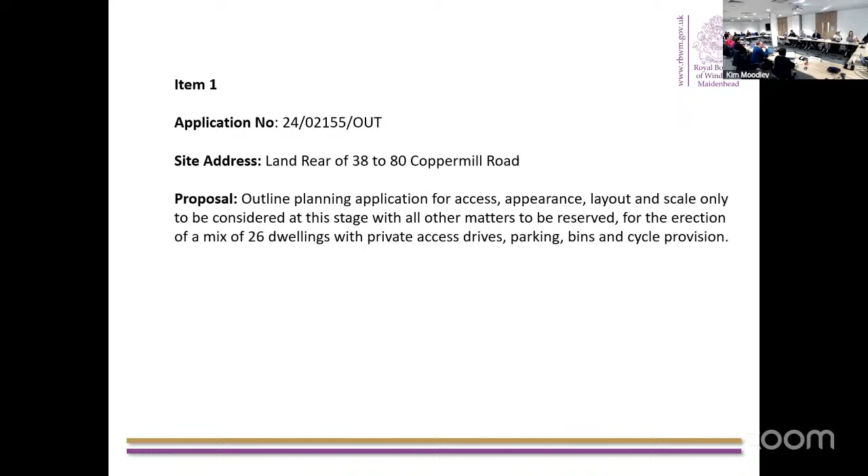Okay, thank you, I'll move on to the presentation. Since this is a more unusual site, and given the way the planning balance is done, I thought it'd be useful to give the context and explain how the planning balance was carried out first, before moving into the plans and detailed considerations.

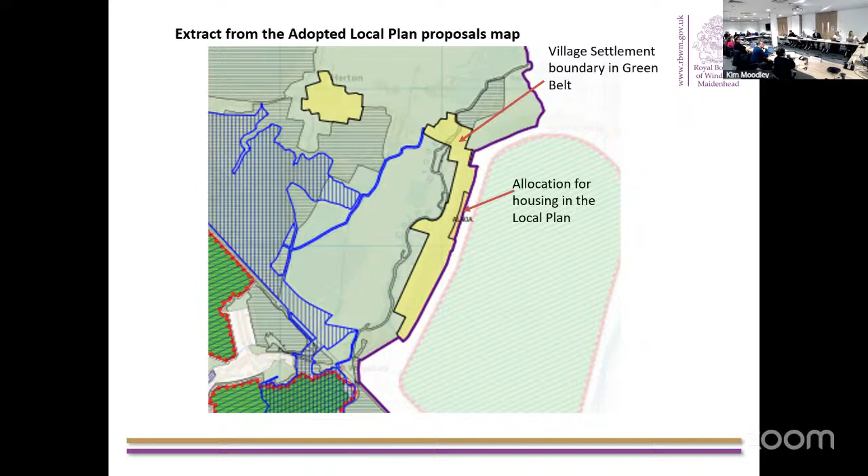When you do the balancing in the green belt, you have to consider whether there are other considerations which clearly outweigh the harm to the green belt, and the other harms arising — that's set out in paragraph 153 of the framework. In officer's opinion, there are not other considerations that clearly outweigh the green belt harm and the other harms identified, and I'll go through that in more detail as we proceed.

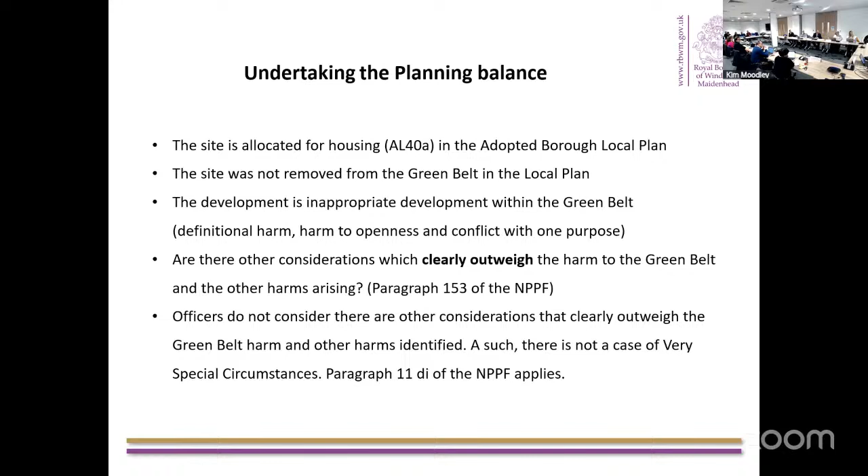So when you come to that conclusion, a case of very special circumstances doesn't exist. In terms of the tilted balance, normally, if you're not restricted by green belt or other matters in footnote 7, you'd have the presumption in favour of sustainable development. In this case, it doesn't apply, because we're saying there isn't a case of very special circumstances.

I just wanted to make the point that, as this is an allocated site, if you did have a policy-compliant scheme that met the proforma requirements, you'd probably end up concluding there was a case of very special circumstances, in which case the tilted balance would be engaged. I'm making that distinction because I think it's important to know going forward, but for the purposes of this scheme, the tilted balance is not engaged. I hope that makes sense, and I'm happy to clarify once I've gone through the slides.

In terms of how the balance has been done, paragraph 153 of the framework sets out the approach. Local planning authorities are required to ensure substantial weight is given to any harm to the green belt — that can be definitional harm, including harm to openness, and conflict with purposes. It states that inappropriate development is, by definition, harmful and should not be approved except in very special circumstances, and those very special circumstances can't exist unless there are other considerations that clearly outweigh the green belt harms and other harms.

These include delivering a high quality scheme that fronts onto Coppermill Road and respects the character of the neighbouring residential units and the openness of the green belt. There are also requirements about preventing access to the reservoir to the east of the site, providing appropriate mitigation measures for noise and air quality impacts from Heathrow Airport, protecting trees worthy of retention, providing a soft landscaping strategy to reflect the character of the local street scene, considering flood risk as part of a flood risk assessment since the site is larger than 1 hectare, providing mitigation for surface water flood risk, having a SUDS scheme, and the provision of 40% affordable housing.

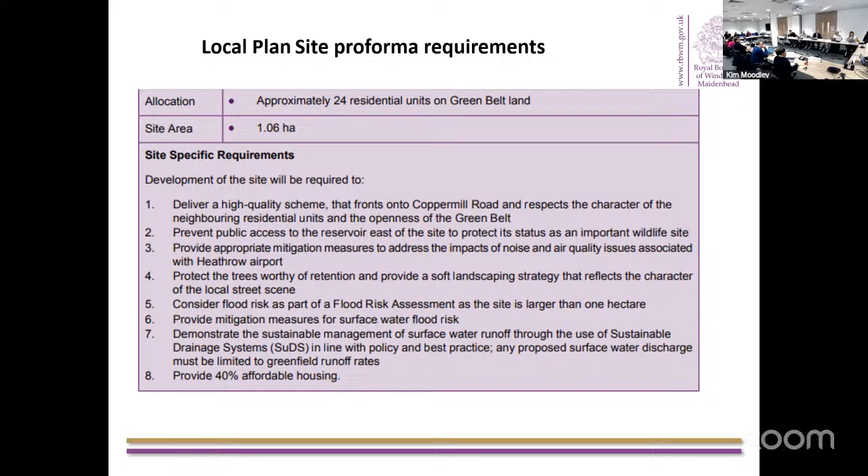So in terms of that balancing that I've talked about, and again, I'll go into more detail of that when we go through the scheme, there are benefits that weigh in favour of this scheme.

It will provide 26 houses, and that will make a contribution to the council's 5-year housing land supply. It's providing housing on an allocated site for housing. You have the economic benefits from the construction period, but then also the operational period when the occupants are in and the spend with that.

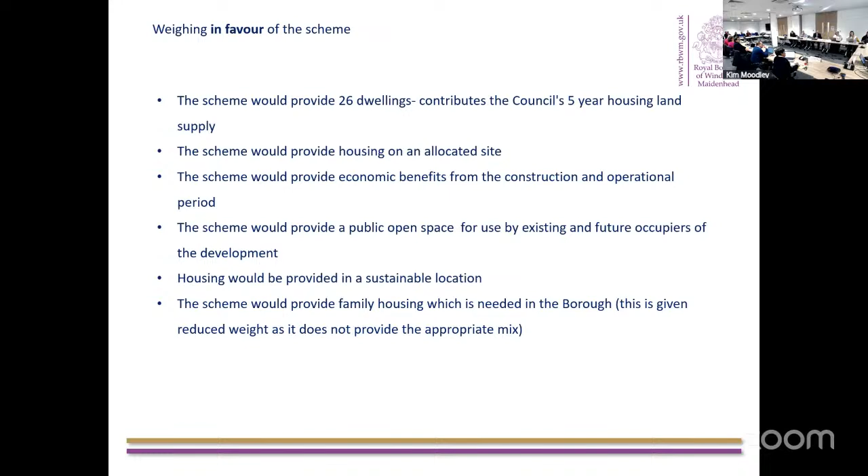As part of the scheme, public open space is proposed, which could be used by the existing occupants of Coppermill Road, but also future occupiers of these dwellings. The housing would be provided in a sustainable location, and it would provide family housing, which is needed in the borough. However, this is given reduced weight because it's not meeting the housing mix required by policy.

And then in terms of the harms weighing against the scheme, there's identified harm to the character of this area, which I will explain more in detail soon.

The failure to provide affordable housing. So I'll draw on that now, actually. A viability assessment was submitted with this application, which shows that affordable housing can't be provided on site or an off-site contribution.

The conclusions of that report have been independently reviewed by a consultant, and the results of that assessment aren't disputed, in that there are perhaps some disagreements with some inputs and outputs, but the ultimate conclusion by both parties is it's not viable to provide affordable housing.

But there is a conflict with policy, but I think in terms of this scheme, because it's quite a high spec development, it's the build costs that are driving it up, and that's what's sort of triggering it not being viable.

And we have got guidance in the affordable housing SPD, which talks about when designing schemes, looking at different options to maximise viability. In this case, that hasn't been demonstrated. So that's a reason for refusal.

The failure to provide an appropriate housing mix is another one. Probably don't need to show you the plans for that, but in terms of the provision, there's an over provision of 4-bed houses, which far exceeds the housing requirement in the housing mix policy. And then the smaller units as well, that doesn't meet the policy requirements. So the mix of housing proposed is not meeting the policy requirements.

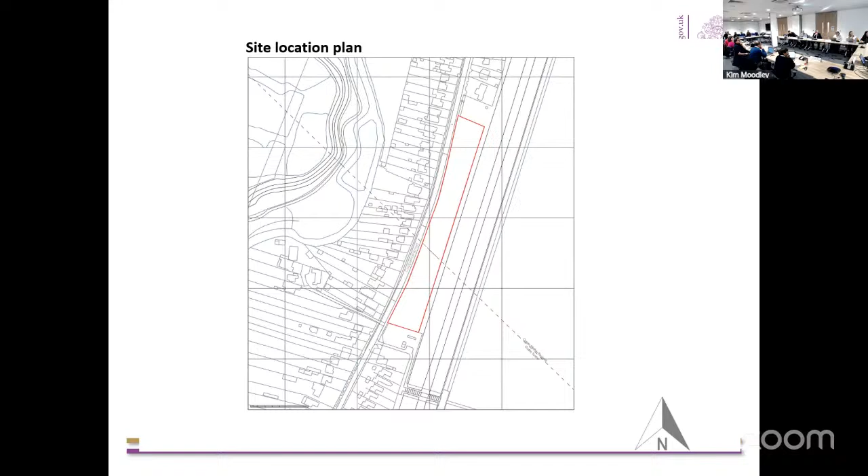So before you was the site location plan, which just shows you the site we're talking about.

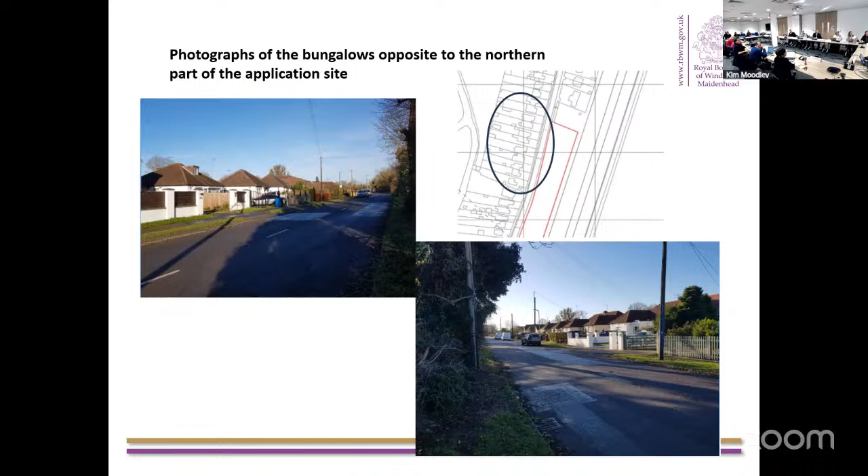And these are photographs of the existing street scene. In the northern part, opposite the northern part of the application site, tends to be bungalows, but they've got pitched or hipped roofs. There are flat roof dormers in this area.

This is another street scene shot from number 56, looking south. You can see it rises up to 2-storey dwellings, but again the roof forms tend to be pitched.

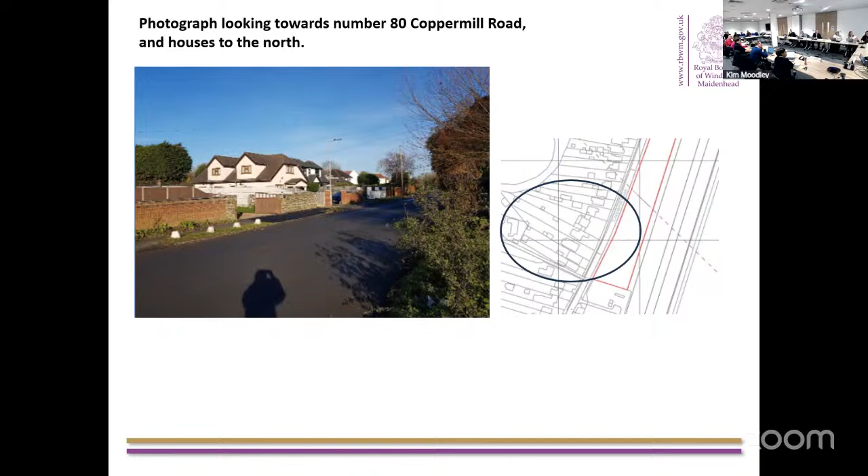This is from the southern end of the site, looking at number 80 Coppermill Road onwards. So you can see the dwellings do vary in the area, but they do have some sort of common themes with their roofscape. The use of materials is quite simplistic, in that there's not lots of different materials applied generally. It's just another example of the street scene.

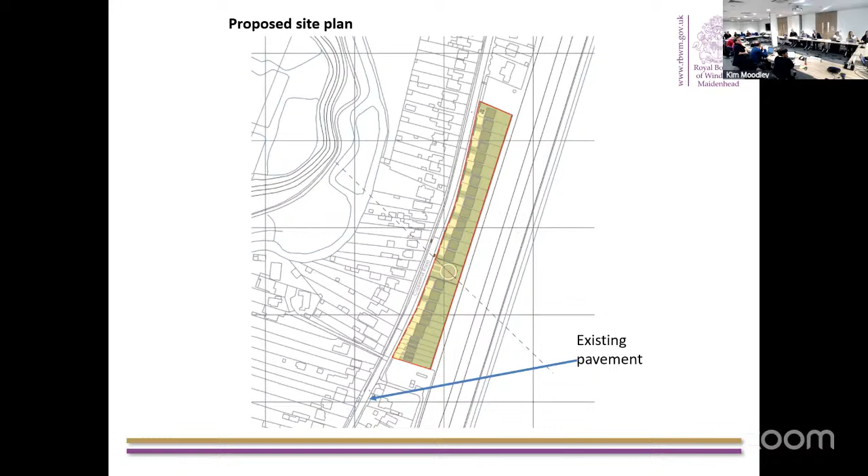But in terms of those future occupiers, they could cross over the road to the other side of the pavement, but no crossing is proposed. Otherwise you're sort of forced out onto the road to walk, and that's just showing where the pavement starts and the sort of pedestrian connectivity around there.

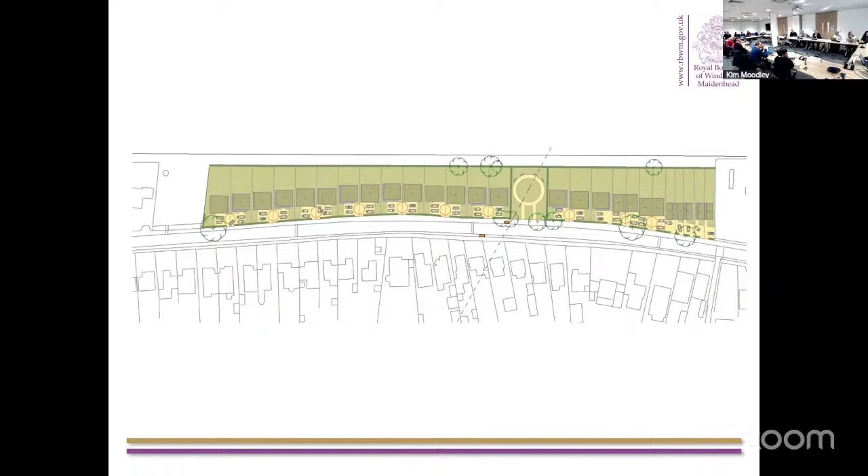This is just giving that more detail, so you can see the parking provision. It's the site split in 2 halves of how that layout works.

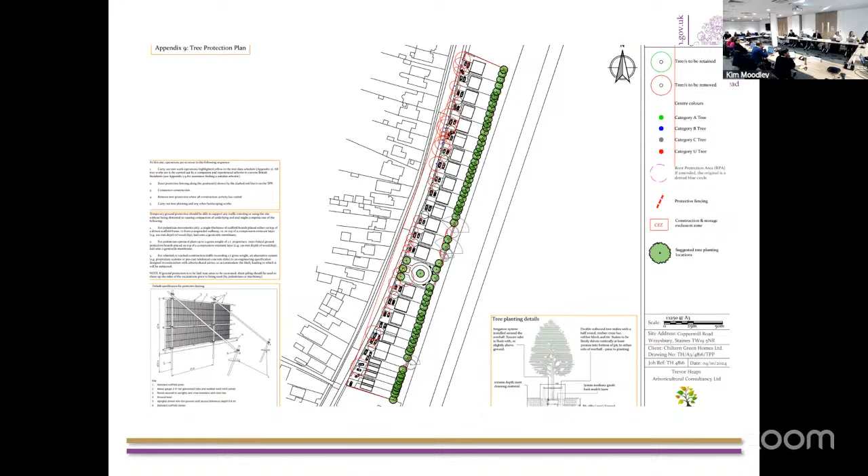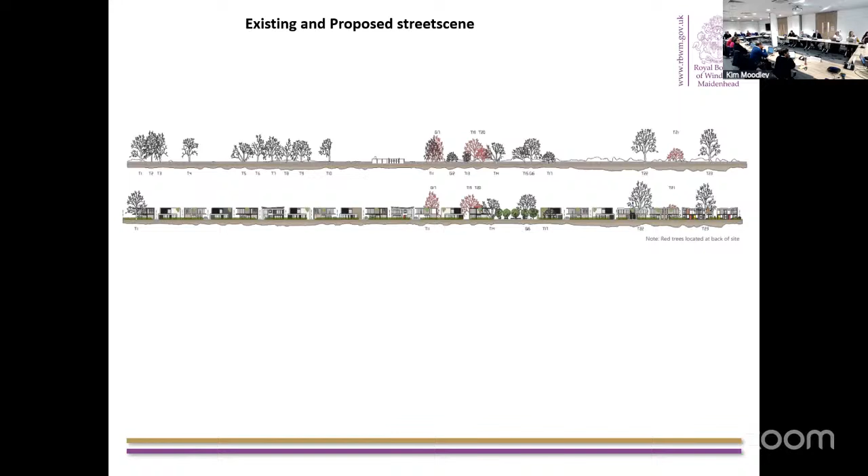I'll move on to the next one, which just gives a bit more detail of the dwellings and how they would look within the street scene.

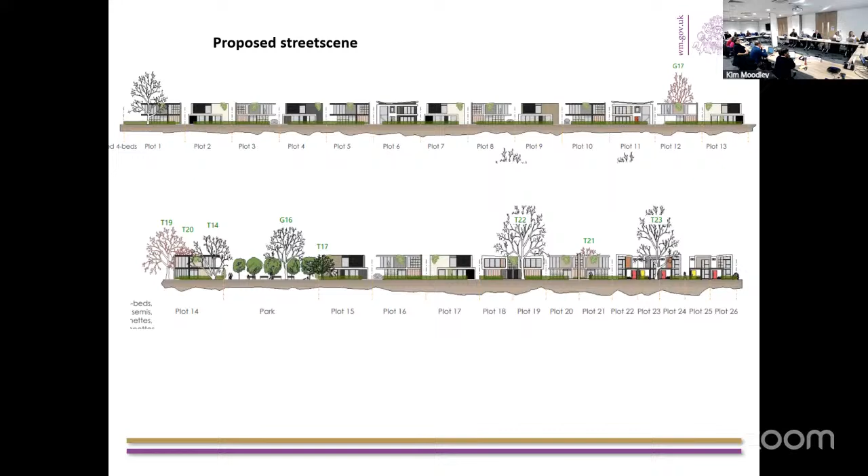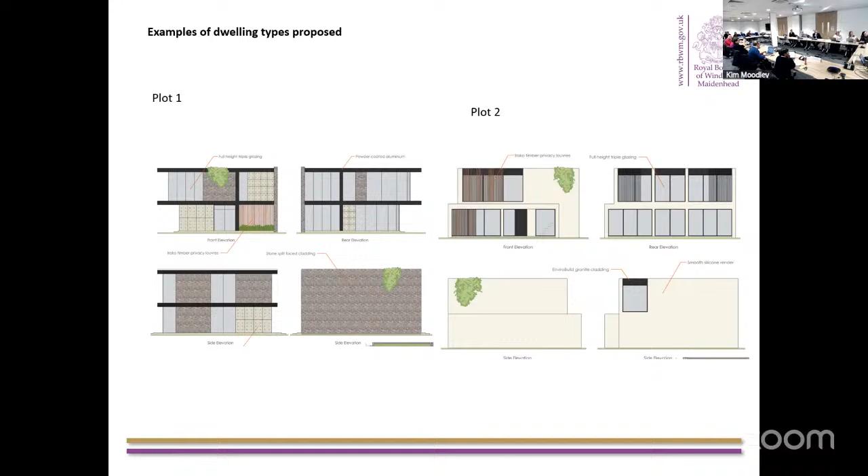I just thought in terms of actually, because a lot of this will come down to the design of it and whether it fits in with the character of the area, this just gives in more detail so you can see the design, the application of the different materials to the certain dwelling types.

Some of the dwellings, the smaller dwellings at the end.

So in terms of the green belt harm, which I've identified, and in terms of character, this primarily comes down to, in officers' view, the bulk of the dwellings doesn't respect that of the existing buildings in the area, and that is a requirement of the Design Guidance SPD, which supports the local plan policy on design.

In terms of the application of materials, some are that, as proposed, the render is common in the area, but most of the materials on the dwellings don't pick up on the local materials. Certainly for plots 22 to 24, there's an application of quite a few different materials, which again is out of keeping with the more simplistic material palette in the area.

And then roofscape is another thing, which again is in the SPD about picking up on the roofscape of buildings in the local area. So flat roofs in this case, apart from having flat roof dormers on some of the dwellings, that's just not the prominent roofscape.

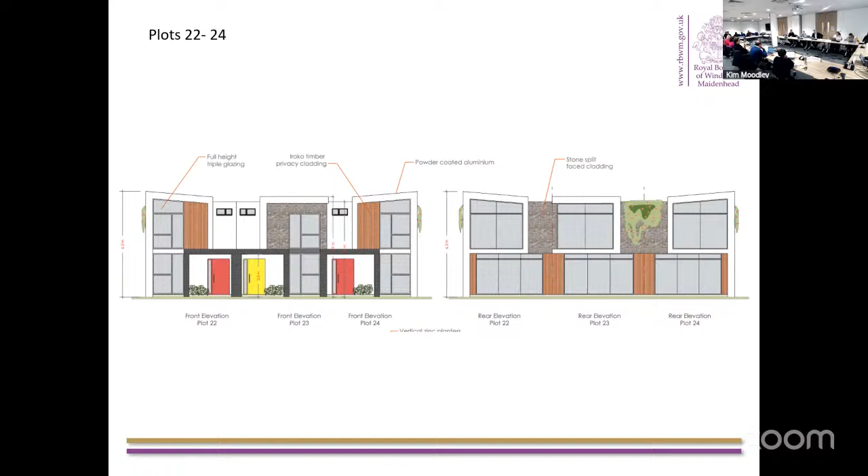We don't have a speaker at all on this application. So if I can ask the panel if they have any questions to raise, please indicate in the normal manner, and we'll go to the examination part. Anybody?

Councillor Beckley. Thank you, Chair. I'd just like to say thank you to the officer. It's one of the most detailed, informative presentations I've had the pleasure of since I was elected in 2023. So thank you for that. You've answered so many of the questions that we probably have as a panel.

But I've got one, basically on the open space being presented by the applicant, and we're talking about pedestrianisation here. I'm presuming there'll be children on this development. How would they reach that open space? Because we discussed going out onto the road, and they'd have to cross the road and then cross back to get to the open space if they lived at either end of the development.

Chair, thank you. I think that's the other thing - it's not just about people walking to the train station, it's about that open space which is publicly accessible. And as you point out, there is not a pedestrian footway proposed, so it's not been designed taking into account pedestrians first for this. Is that fine? Absolutely, yeah. Councillor Davies.

Thank you. So I have two questions, both relating to Greenbelt land. First one: in previous applications, we've heard of areas that were in the Greenbelt but were then taken out because they're in the borough local plan. This site is in the borough local plan, so why is it still considered in the Greenbelt?

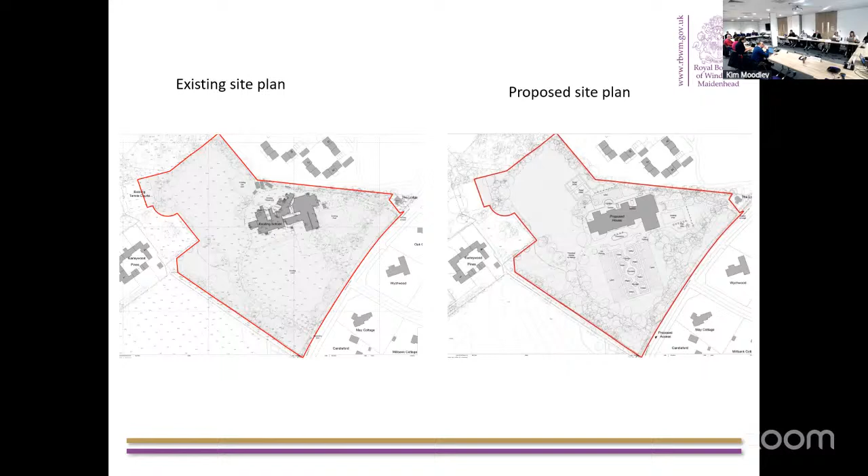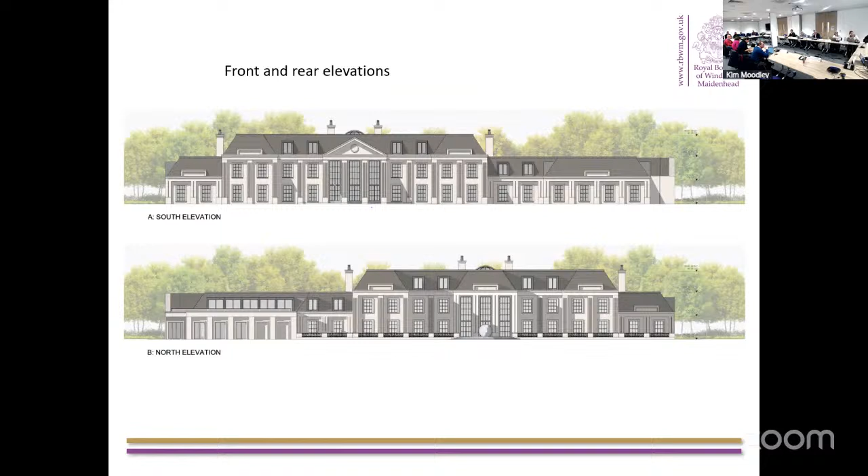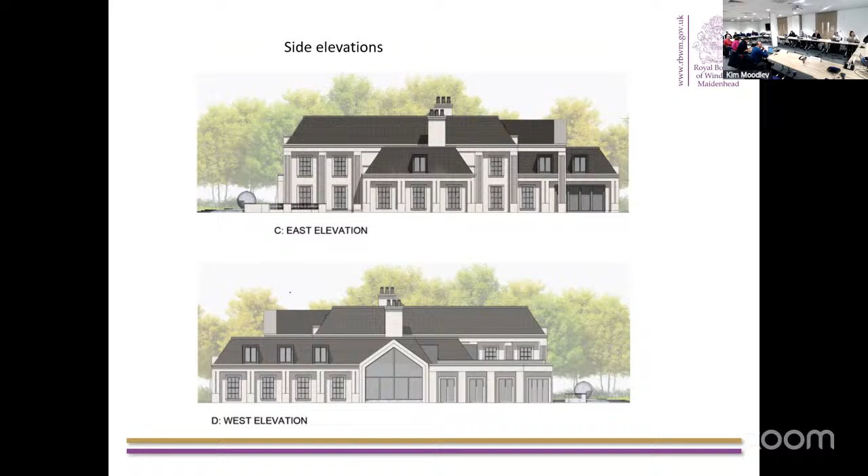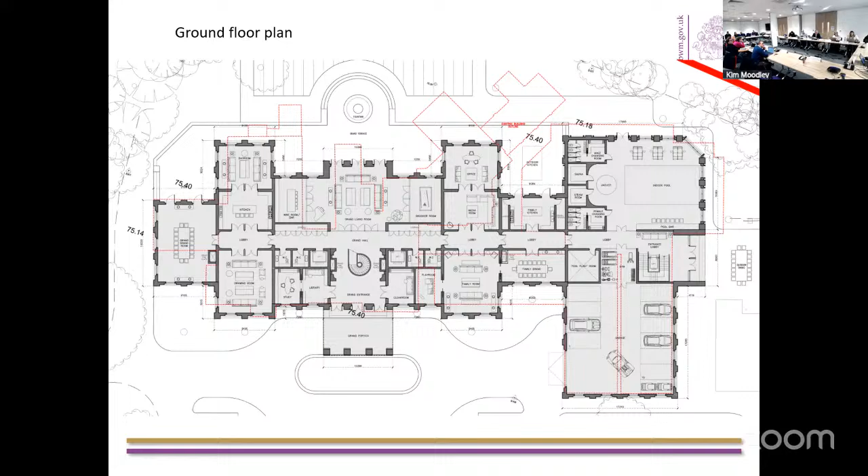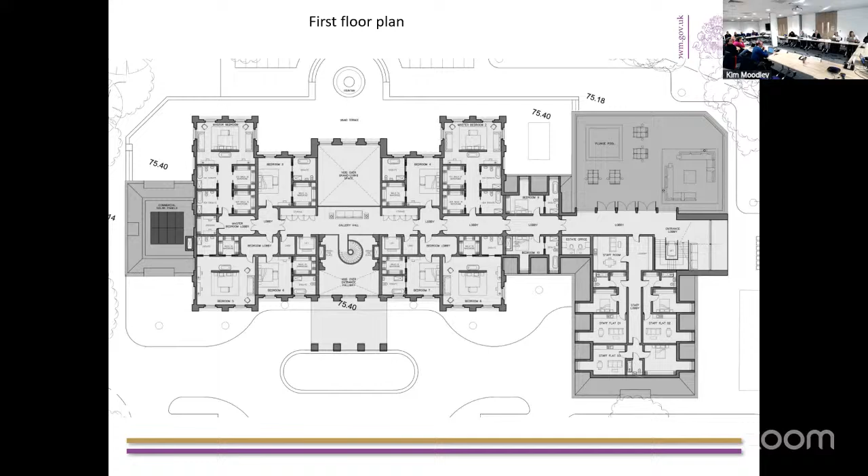This slide shows the proposed first floor plan, with 10 ensuite bedrooms and staff accommodation over the garage wing. There is a terrace area proposed to the northeast of the building, closest to the boundary with Meridian Court, which is heavily screened with trees.

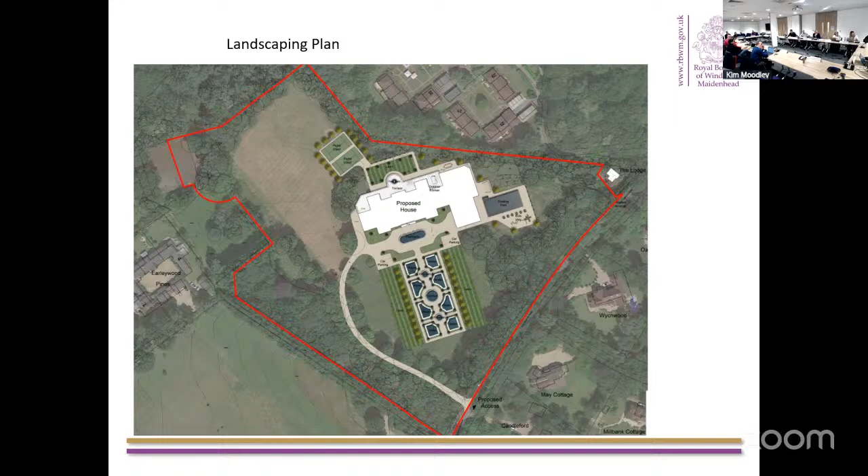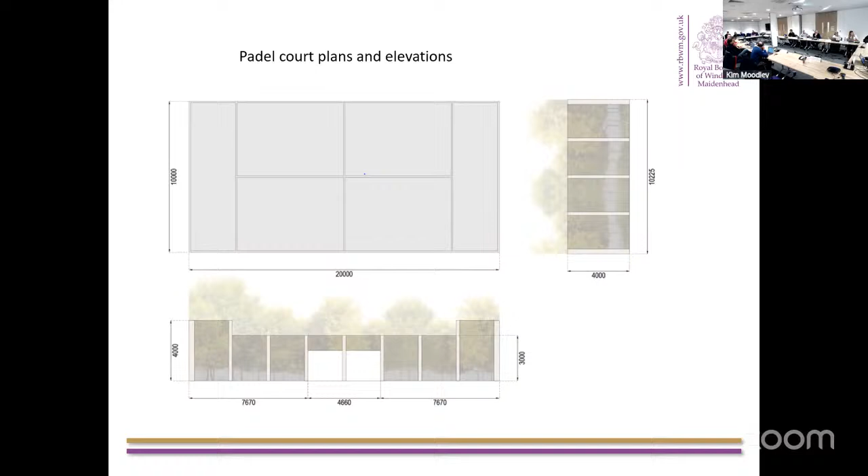Also, as stated earlier, the site lies within the green belt. Paragraph 154 of the NPPF sets out the exceptions to inappropriate development within the green belt, one of which is the redevelopment of previously developed land, which would not cause substantial harm to the openness of the green belt.

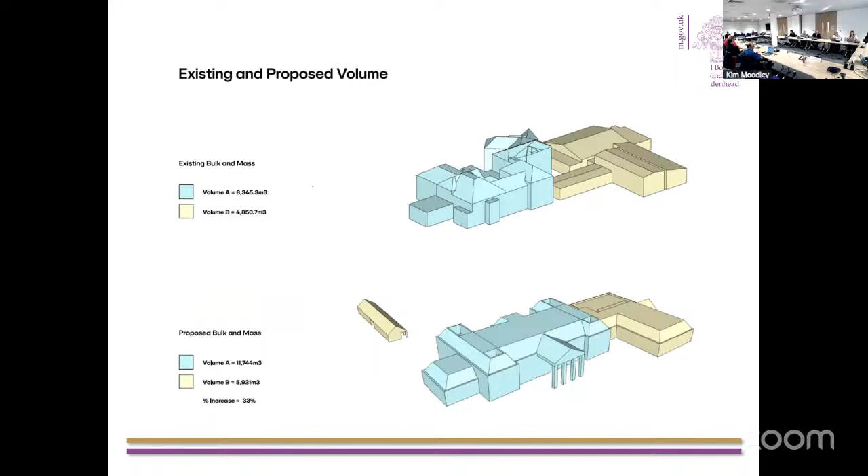As can be seen from these volume comparisons, the proposed dwelling house would have a similar spread and siting as the existing buildings, albeit larger in mass and bulk. The existing is the top image, and the proposed is below. The volume uplift is approximately 30%, which officers do not consider to be substantially harmful to openness. Thus, we believe the exception of paragraph 154G of the NPPF is met, and the proposal constitutes appropriate development in the green belt.

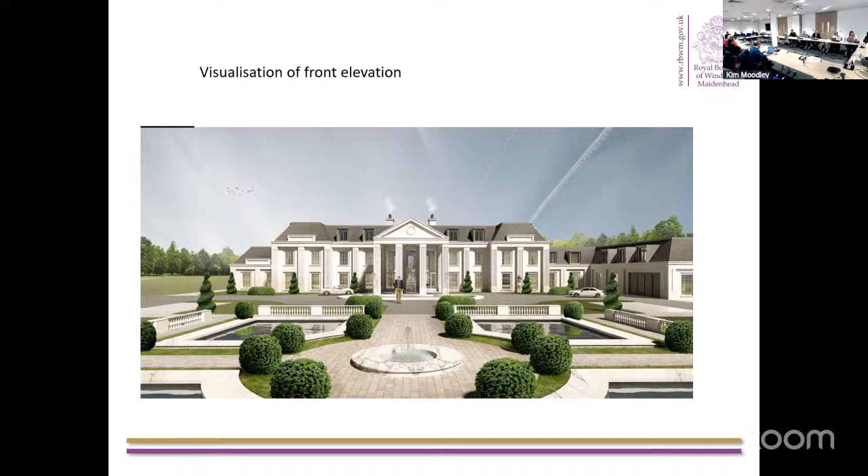This slide shows a visualization of the front elevation of the dwelling with formal landscape gardens.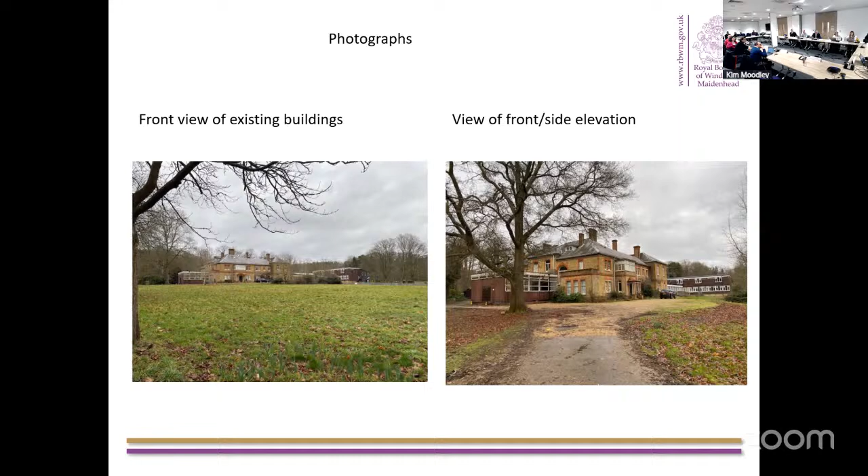These photos are of the front view of the existing building.

The view of the western elevation of the school buildings on the left, and on the right the tree-lined driveway which accesses the site.

I've set out some primary considerations here for an application of this nature.

Firstly, the loss of the vacant school building is an important consideration. This is considered acceptable in this instance when assessed against policy IF6. The private school which formerly resided here was relocated to an alternative site in 2018, and the building has since been vacant. Throughout the course of the application, we have consulted with the Children's Services Department, who have confirmed that there's no educational need for the site.

Another important consideration is that the site comprises previously developed land in the Green Belt. The quantum of development proposed would not result in substantial harm to the Green Belt compared with the existing development. The proposal is therefore appropriate development in the Green Belt under paragraph 154G of the NPPF.

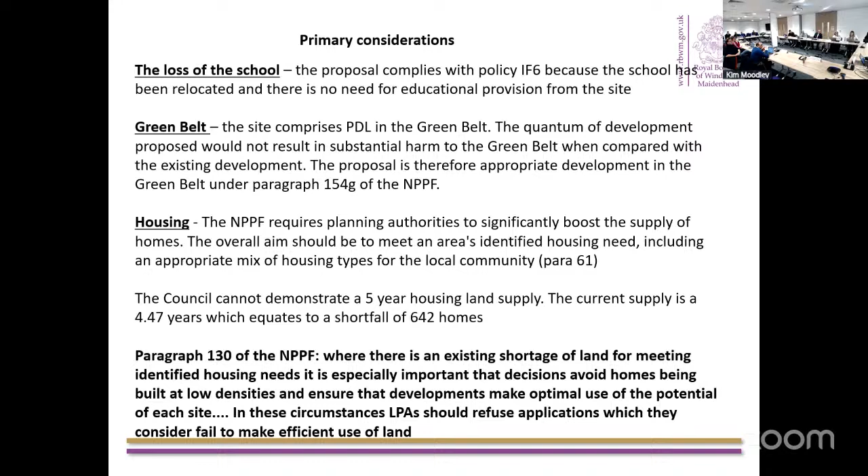In terms of other key policy considerations, no policy conflicts have been identified in relation to impact on neighbouring amenity, impact on the character of the area, trees, highways, or flood risk.

However, the application fails to provide ecology surveys to demonstrate the presence or otherwise of bats within the school building and two outbuildings on the site.

Furthermore, in the absence of a Section 106 legal agreement, the proposal fails to provide mitigation to the Thames Basin Heaths SPA, fails to provide a policy-compliant affordable housing contribution, fails to secure significant on-site biodiversity gain which has been proposed, and fails to secure a carbon offset contribution.

Whilst such matters could in time be resolved through the legal agreement process, such measures are not in place at the time of determining the application, and without them, the proposal conflicts with the relevant development plan policies.

In terms of the planning balance, the council is unable to demonstrate a 5-year housing land supply, and as such, decision-making should be carried out in accordance with paragraph 11D of the framework.

In this case, paragraph 11D1 is triggered, as the absence of a legal agreement to secure mitigation to the Thames Basin Heaths SPA provides a strong reason for refusing development. The tilted balance is therefore not engaged in this instance.

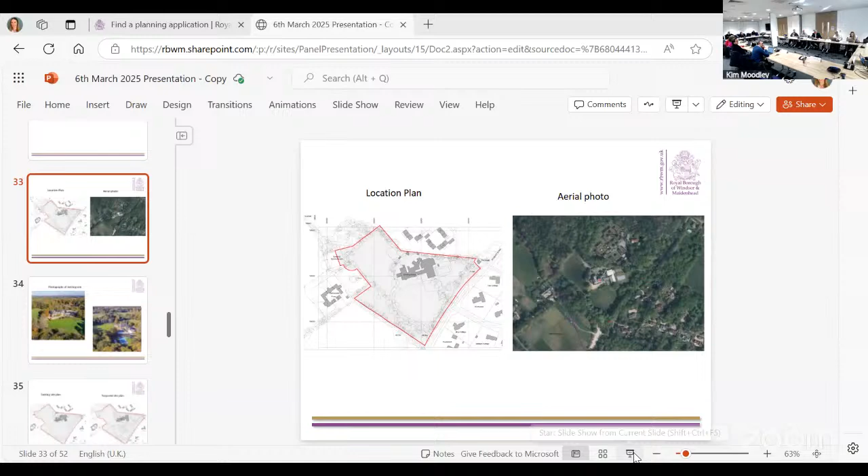I'll pick up on your comments about the types of housing in the area and the density. So I think this is a good slide, because the application site here shows one very large building. To the north, I think this is Meridian Court - these are terrace bungalows, much higher density. Here, I think it's Earlywood or Earlydean, a courtyard development, that's on the other side of the road. And then the other side of Bagshot Road, we've got detached dwellings, and the plot sizes are much smaller than the application site. So there's a mix in terms of character - there's not a policy objection in terms of character. There's a really strong policy concern about the inefficient use of land, in the context of where we need to determine applications given the lack of a 5-year housing land supply.

Thank you, Councillor Mark Wilson. Thank you, Chair. Just thinking about this, there's a bit of a dilemma in my mind. Thinking about the numbers - we're saying maybe 50 was excessive, it may or may not be excessive now. 1 is too few, but then the 1 is actually a 10-bed. So the proposal is for 10 bedrooms and then 11 car ports - so this isn't really one person.

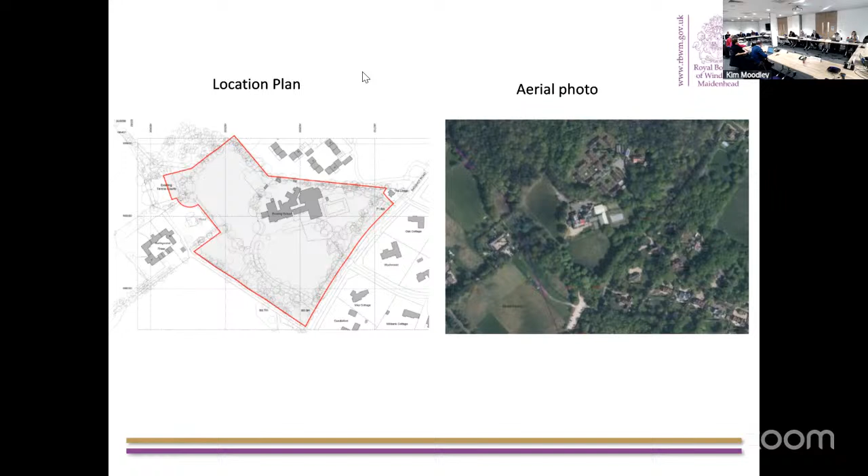Going back to the other objections, I think 106 - I think that question's been covered. It sounds like that's not the all and end all, especially if it's been agreed in principle. But...

Can I ask about the bats? The applicant or the speaker talked about potentially - I think I've got it - a Grampian condition, and I don't know if that's it. Well, that's not something I'd heard of. It looks like it's to do with Scottish law, but it does appear it was mentioned. Is that something you recognise and can it be explained away? I mean, I know certainly in our ward the requirements over bats are rather onerous, I think, and that's just the rules that they are, especially because certain things can only be checked at certain times in the year, and it's cost and time is what it takes.

But let's just deal with that question first. Could you check, or Louise?

Yeah, okay, Grampian conditions aren't used very much anymore. They're not good practice, really. Effectively what they are is negatively worded conditions. For example, there was an issue around ownership of a road - we were having problems finding who owned an access road. At that time, we put a Grampian condition saying you can't commence development until somebody identifies who owns the road and you get permission from who owns the road. It's not good practice to do that. You need certainty when you're putting conditions and securing through 106. So we tend not to use them at all, very, very infrequently nowadays. I'm not saying they can't be done, I'm just saying it's not a tidy way to secure an unknown.